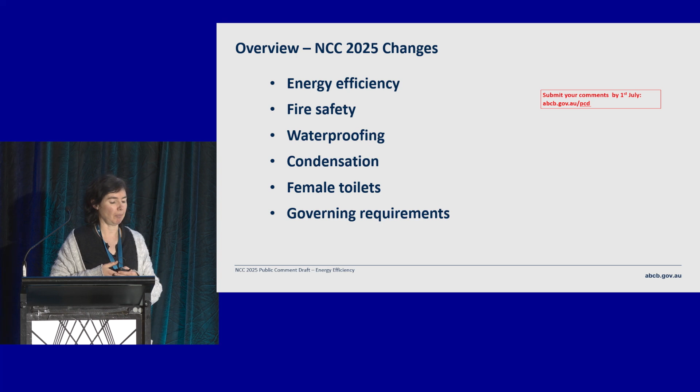With that, I'm going to now be focusing on the energy efficiency provisions for the rest of today's short presentation before we get to Q&A. So to start off with, I'd like to talk about the performance requirements, which are the mandatory elements of the code. That's why I'm starting there.

We have proposed changes to J1P1 and J1P4, which relate to commercial buildings and common areas of Class 2 buildings. For J1P1, we proposed roughly halving the energy intensity target that's set, so it's quite a significant increase in stringency overall.

The other thing we've done with J1P1 is that we've actually included, for the first time explicitly, greenhouse gas emissions targets. So it's not just an energy efficiency target now, it's about greenhouse gas emissions as well. That's reflecting that with our proposal, we're not only looking at energy efficiency, but we're also looking to build in on-site renewable energy generation as a mandatory element.

At the high level, this is one of the things that commercial buildings have to comply with. The other performance requirement for commercial buildings is J1P4.

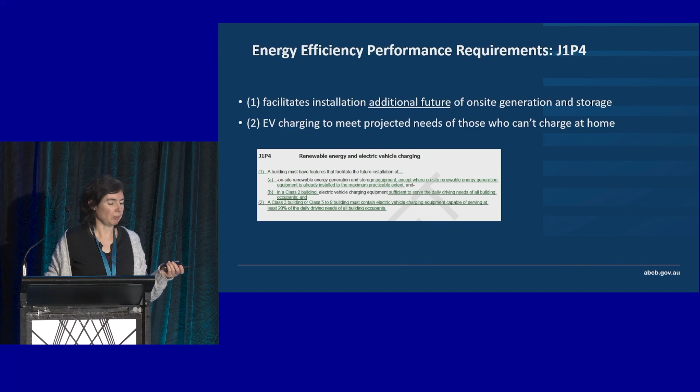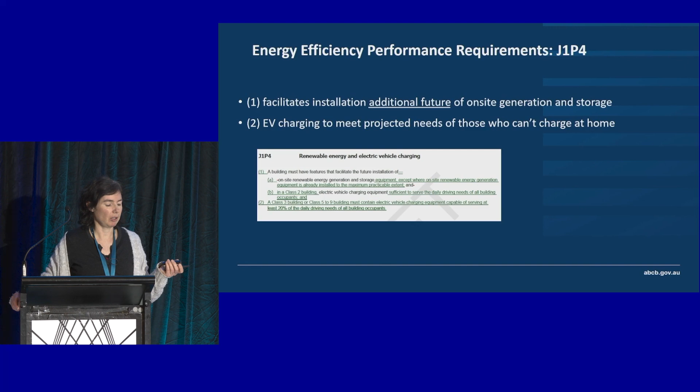I just want to very briefly talk about the methodology we used to set these changes. We had consultants create 11 different archetypes that reflect common forms and technologies used in commercial buildings, and we looked at each type of change individually to see how far we could take it in those archetypes and still get a positive cost benefit.

We also listened to feedback from industry about their experiences using the NCC 2022. That's the overall process we used. We started at the building level, but we've worked it up to a whole economy scale using a CRIS, and as David said earlier on, it's a real page turner.

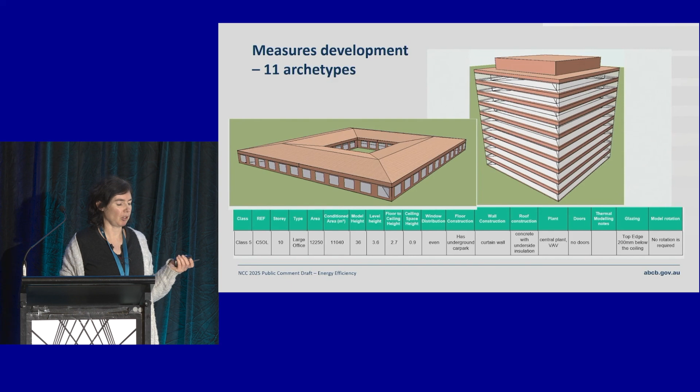So this is what the archetypes look like, just as an example. The one on the left is the small hospital or aged care facility. The one on the right is the large office building, and using an energy modelling package, this is how we tested the costs and benefits from each proposed measure. So I'm going to just have a look at what the key changes actually were.

As you probably mostly know already, there's various ways to show compliance with the NCC. Obviously those performance requirements are the mandatory element, but we have different ways that you can show that you meet them, and one of them is with the verification methods.

We've proposed some changes to those verification methods, starting with J1V1, the NABERS verification method aligned with the NABERS tool. As you would have seen with the performance requirements, and you'll see again in a few minutes with the DTS, we've got a substantial increase in stringency, so all the star rating targets and energy targets have been raised to align with that.

In terms of what we're targeting, this is really important - overall what we're targeting with our stringency increase is least cost, net zero, carbon ready buildings. We're doing that through energy efficiency, on-site renewables, and in buildings that use gas for their services, provisions to make it easy to electrify that building in future, should the future owners or occupants wish to do so. So we've had a substantial increase in all of our targets.

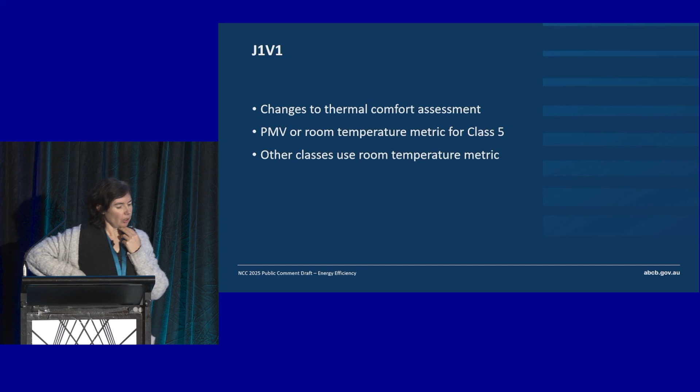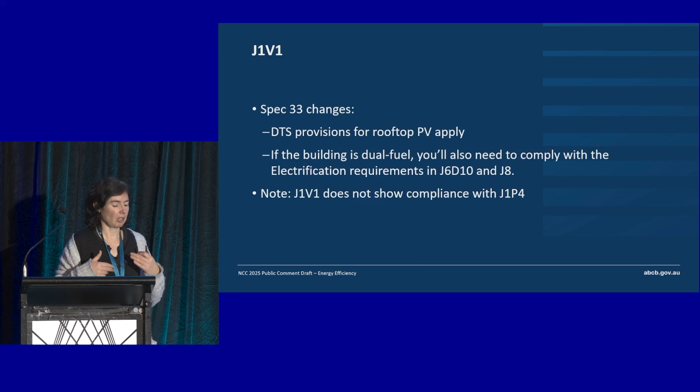In relation to specification 33 for J1V1, these are the schedules that set out the additional requirements you have to do, above and beyond the modelling process that happens with NABERS and the commitment agreement. You'll need to install the rooftop PV just as it's specified in the DTS, and if the building uses gas, you'll need to comply with provisions that make it easier to electrify the building in future - I'll walk through what those provisions look like in a minute or two.

The other thing to note is that the J1V1 verification method only shows compliance with performance requirement J1P1. So in relation to electric vehicles in particular, you would still need to do something else to show that you're complying with that aspect of the code.

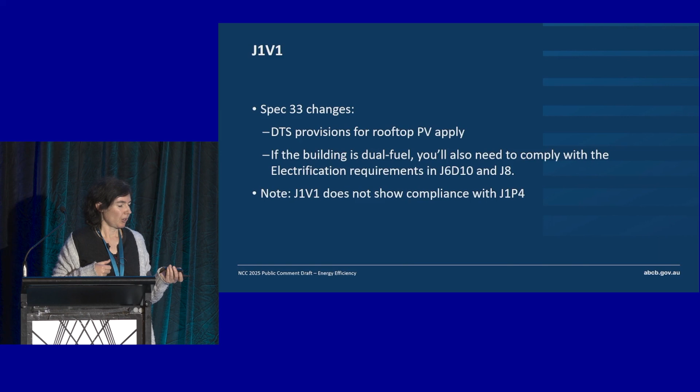Let's have a look now at J1V3, which is the much more widely used verification method based on simulation. I think most of you, if you're working with NABERS as a commitment agreement assessor, are probably working with J1V3 as well, since only one person put up their hand when asked if they'd used J1V1 to show compliance.

In terms of J1V3, one of the big changes is that we're asking people to use a future climate file. Those files have been published by CSIRO - I've put a link there to where you could get one. We haven't specifically said you have to use the CSIRO file, but the one published there does meet those requirements, and it's done under a fairly pessimistic climate change scenario of RCP 8.5 pathway. So it's probably going to place more importance on cooling technologies and cooling energy use in the building.

The other change we've made to J1V3 is that we've removed the ability for people to offset the performance of their envelope by putting in PV. There's a bit of a loophole in the code at the moment where you can put PV into your model and use that to degrade the performance of your envelope. It doesn't make sense to have that in place anymore, especially because we're requiring PV on site as part of the reference building, as part of the DTS, and in line with our new, more stringent proposed performance requirements.

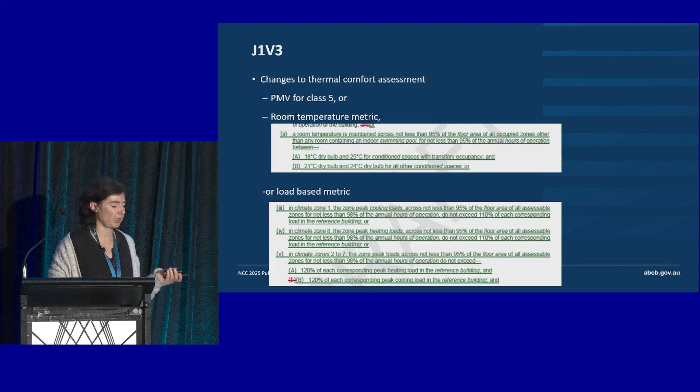There's a number of other changes. I think I've got really limited time, so I'm probably not going to talk through them all now in terms of the simulation-based methods, but I would encourage you to go and read the public comment draft if you haven't already. You've got until the 1st of July to submit a comment, basically tightening up some aspects of that modelling. And for J1V3 especially, you need to read the code itself.

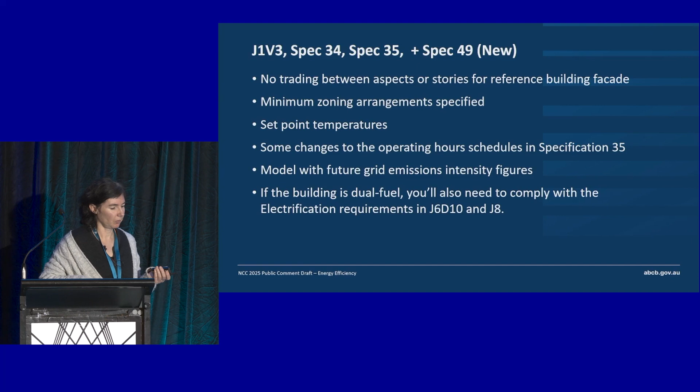In terms of there are other supporting materials and documentation about how we develop the DTS, but for the J1V3 and J1V1 modelling, it's really going into the code and looking at the modelling parameters and giving us your feedback on those as they are written.

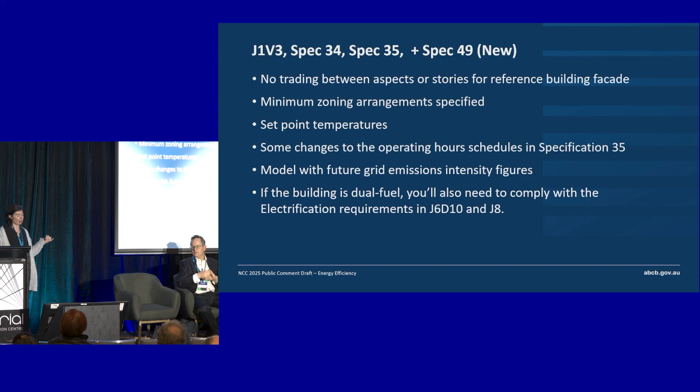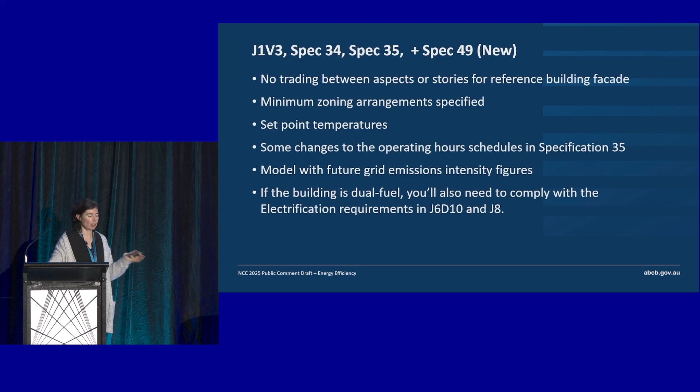So the intention here is either to clarify, with a lot of these particular ones here now that are on this screen, the intention is either to clarify or reduce opportunities for gaming, or just correct it. I mean, some of the schedules, operating schedules, didn't really match how people are likely to use the space. So some of those kinds of changes as well.

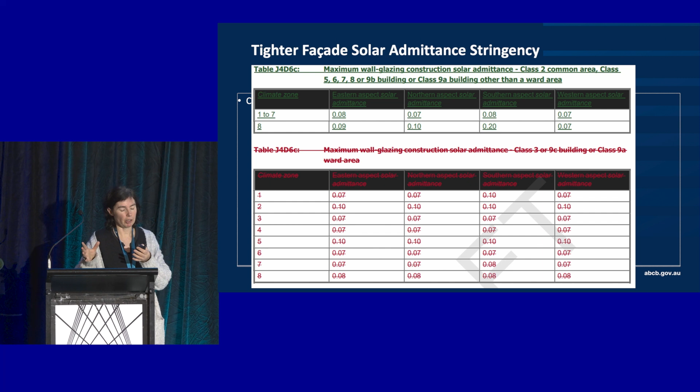So now I'm going to talk about the DTS. And actually DTS is kind of at the basis of all of this, because you feed a DTS building into your modelling process to use it as the reference building if you're using J1V3, and actually the changes to the performance requirements have also been built up out of the analysis that we did from DTS to see how far you could go. So there's quite a raft of changes in the DTS.

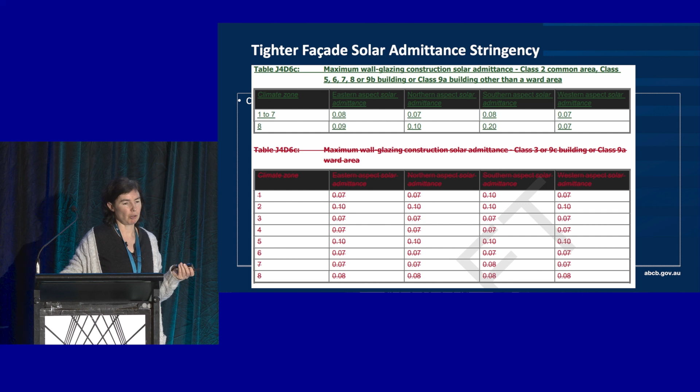Firstly, we're proposing tighter solar admittance for the wall glazing facades. So you can see that in these values, the lower targets that are shown in green. This is just an extract from the public comment draft. They're the new proposed solar admittance changes. So that'll be taking into account solar admittance. It's taking into account solar heat gain, shading, window to wall ratios, all those kind of things go into the solar admittance calculation. So it would be encouraging better performing, better shaded windows, better design.

We also have somewhat tighter U values that have been proposed for wall glazing, so better insulation. The changes aren't that big in some of the building classes and climate zones. It's more, probably the solar admittance ones are more significant, I think.

Now, also while we're talking about building fabric, we've made a clarification to where the envelope sits, which is basically the boundary between the conditioned space and everything else. So there was a requirement that's being interpreted in a way at the moment that is making people put insulation between spaces, or people are, I guess, interpreting it to put insulation between spaces that are going to sit at a very similar temperature for operational reasons or due to the nature of the space.

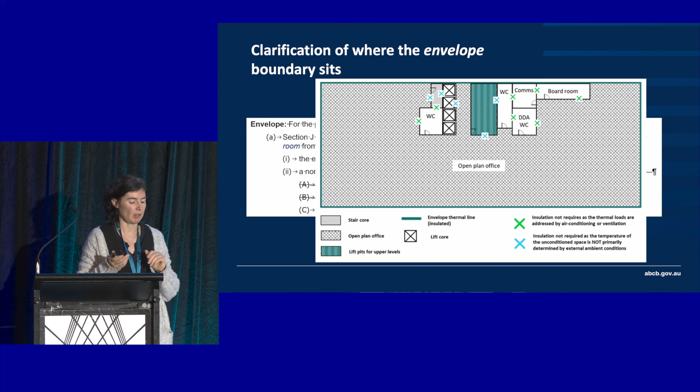So we've tried to clarify it so that people will not be putting insulation in between those types of spaces where there's no benefit. So that should actually lead to a cost saving, but no decrease in performance, because it wasn't doing any good in those spaces if the two adjacent areas had the same temperature anyway.

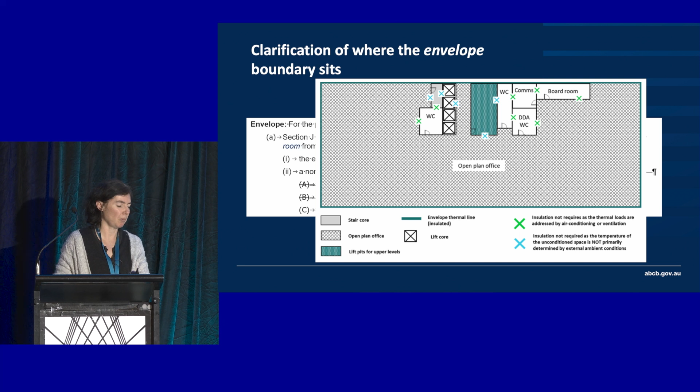The other thing regarding envelope is we've included provisions within the DTS for vertical shading. This means you can recognise the benefit of vertical shading without being forced into a performance solution or a simulation-based solution. There were very limited ways to take vertical shading into account in the DTS previously, but we've expanded that.

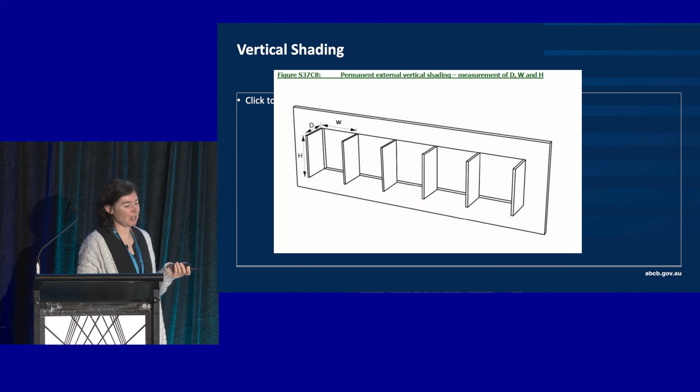We have to pile it on. All right, what's absolutely essential for you to get across in the next few minutes? Well, probably the number one thing is to go and have a look at the public comment draft if you haven't already done it.

As you can see, we have made some changes to the fabric provisions in J4. All of this is still relating to fabric, so solar reflectance index for the roof. We've also made changes in relation to the HVAC provisions.

One of the key ones, because we're aiming for that least-cost net zero carbon ready outcome, is for buildings to be able to be ready to electrify in future. So while the code doesn't require buildings to go all electric from day one, you can still do gas within the DTS.

If you do gas within your building for space heating, domestic hot water, swimming pool or spa, you will need to make provisions to make it easier to retrofit electric heating later if somebody wants to do it. This involves leaving space for the electric heating equipment, ensuring there's sufficient electrical capacity in the incoming supply, the main switchboard, the risers and distribution boards in the building, and ensuring that where the electric heating plant might eventually go, that reserved space has access to the hot water distribution system.

Even though Frankie has pointed out there are lots of different ways to do all-electric heating, generally if people are putting gas plant into their building, it's going to be feeding that heating into a water-based distribution system, and electrifying that distribution system later is going to be really hard if these provisions haven't been made. It was certainly found to be cost effective to do this.

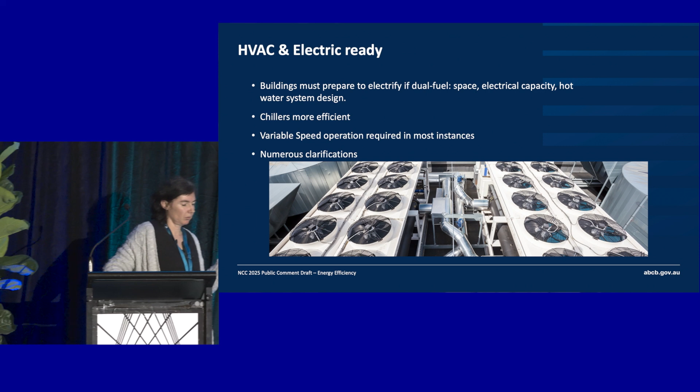So essentially, if you were designing for gas for a new building, you also have to do a design for electric — you need to do 2 designs for your building. You have to make sure you account for the electrical capacity and the space for ripping out that gas and putting electric in there. So that's a requirement, you have to show how you're going to electrify at time of construction. There's also additional solar requirements to have a look at as well.

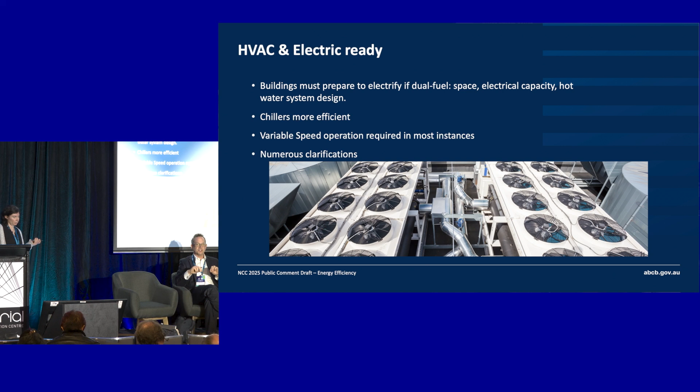I just don't know why you'd bother, hey? No, it's fuel neutral. Yeah, which comes back to our policy authority, actually.

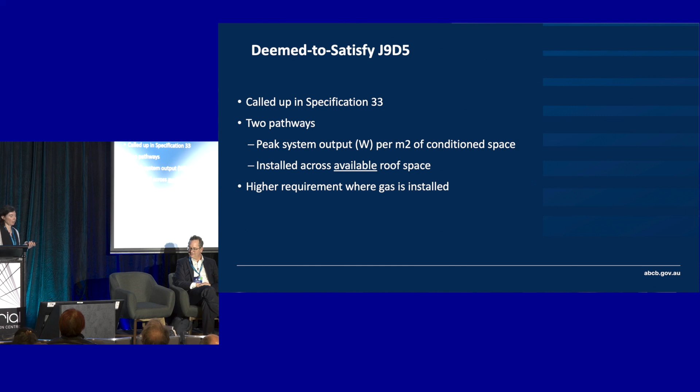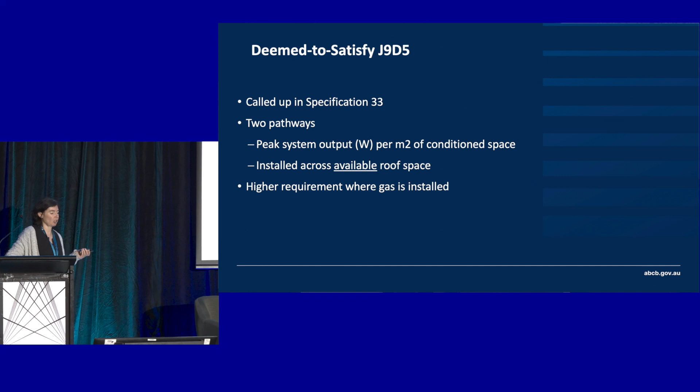The other thing I'd like to point out, which I already mentioned, is that there are mandatory requirements for on-site renewables as part of the proposal. This is the first time we've had that in section J — well, if it gets adopted, it'll be the first time we've had it.

There are two different ways that you can specify the on-site renewables in the DTS. One is basically to max out your roof space with PV — that's actually the second item in that list on the slide. We think most buildings will do it that way, because the other way is watts per metre squared of conditioned space. But if you have a small roof area and a big conditioned space, that's just not going to be achievable. That's why we've put the item limited by roof area as an alternative pathway.

But overall, these provisions around PV were designed to maximise the amount of PV that you would use on site. The analysis shows commercial buildings have a really well lined up time between when they're pulling a load and when the PV is available. So it's very cost effective to use the PV on site, and this is, I guess, a big reason why

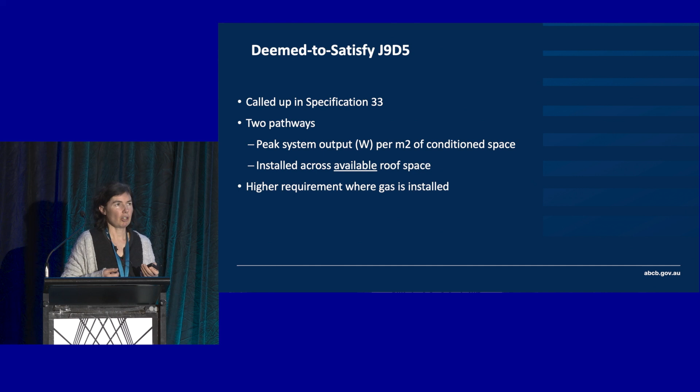we've got such a positive result showing in our economic analysis for stringency. Stringency 3, the most ambitious stringency level that we investigated, this is part of what's in the public comment draft, and our economic analysis showed nationally a $17 billion economic benefit from doing this.

There's plenty of questions online, so I'll start one. We're going to do a rapid fire thing, right? I'm going to fire one at you and you've got 30 seconds to answer it, okay?

Are there intentions to include embodied carbon requirements into section J? And if so, are there plans to include a performance verification pathway using NABERS, kind of like J1V1? Yeah, yes and yes. It's not in the public comment draft as it's written at the moment, but we're definitely in conversation with NABERS about including that. There would be a plan to also include other pathways for embodied carbon in the National Construction Code going forward.

What kind of provisions are being made to help buildings have features that make them climate resilient by protecting them from the climate risks of drought and flood? If you've got questions in the room, now's the time to raise your hand.

But the main thing from an energy efficiency perspective is better envelopes. That's really the key thing that we have, and the use of future climate files in your modelling processes, so that the building will reflect the climate it's going to exist in.